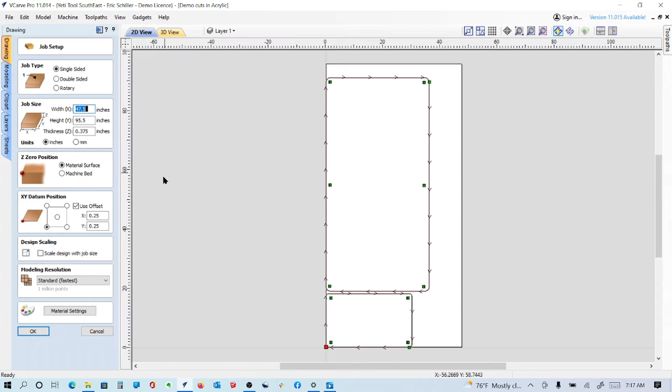So then with the laser light, I peg it on the corner of the material, and I would have these parts shifted up an inch or so, however I'm holding it down. I don't know. I may be pre-drilling this into the spoil board. He may be using tape, CA glue. I'm not sure what his method's going to be, but I would turn this off personally. So we'll let that go though and tell it okay.

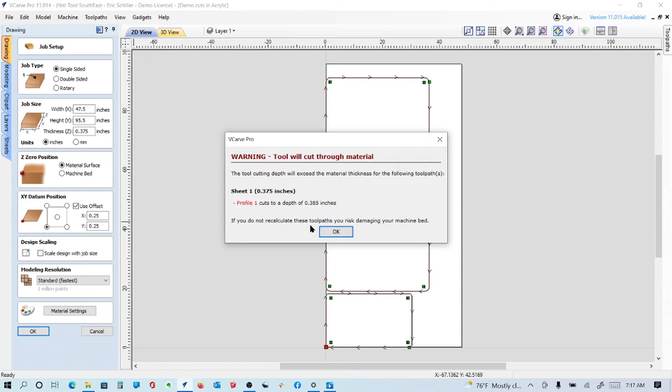It's warning that the setup is going to cut through the material, and it's only going 0.385. So he's only going 10 thousandths of an inch into the spoil board. I typically go 20 thousandths, 30 thousandths. I use the spoil board as a spoil board. I cut through it on purpose and just replace it. I use paneling. I do not use 3/4 inch material for the spoil board.

The table on the SmartBench is a little different in that it only supports the spoil board where the X beam is and in the middle of the table. So in my shop in Birmingham, if I leave a piece of 3/4 MDF up on the spoil board over the weekend, it's going to droop on the corners here. And then when the X beam goes to it to bring everything perpendicular to spindle, it will raise that up. But it'll also, because it's 3/4 of an inch, hump up off of the table in the center of it. So don't use a thick spoil board.

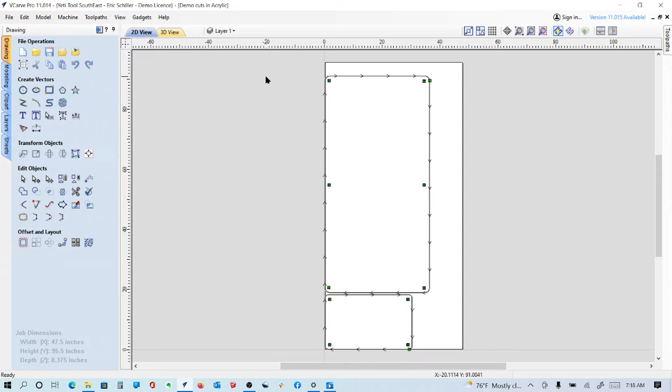There's nothing that says to use a thick spoil board. Everything says use a thin spoil board. On the Yeti, my movies at Yeti Tool Southeast, or any of the movies that are done through the Yeti CNC Academy. So that all looks good. He's got the tools turned on here. So let's just look at what he did. So we're going to hit the curtains and go from the design side to the cut listing side, and we'll look at the profiles that he's using.

Again, he's specifying only 10 thousandths of an inch deep. That's fine though. 3 passes, so 1/8 of an inch per pass roughly. He's cutting on the outside. I would do a separate last pass. I'm not sure how this acrylic is going to be used, whether it's going to have an edge to it or an exposed edge or not. But I typically would turn on and do a separate last pass at 20 thousandths.

And I don't know how he's holding it down, so I would typically add tabs or have some hold down method. And again, if we're drilling these circles here first, we could, depending on how we're doing our runners for the upper beam, screw down through these holes. But I would do ramps. He's got a ramp coming in, and it's set at 2 inches. That's going to be slow if we look at our speeds. So everything basically looks okay here. He's ramping in. It's a longer ramp than you need, but let's look at the speeds.

So we're going to go to the tooling that he selected. It's a 1/4 inch end mill, and we're going to edit the setup, and we're running 19,000 RPMs. That's good, but the feed rate is awful slow. 600 millimeters per minute is not going to give us the speed that we want.

The swarf, the debris, is not going to be adequate to cool the bit, so we need to jack up. And also the plunge rate is only 10 inches per minute. I would double that, so I'd easily go 500 for the plunge rate, and that's 20 inches per minute roughly. I'm not going to do the metric equivalents, and I do everything in imperial numbers on my setups.

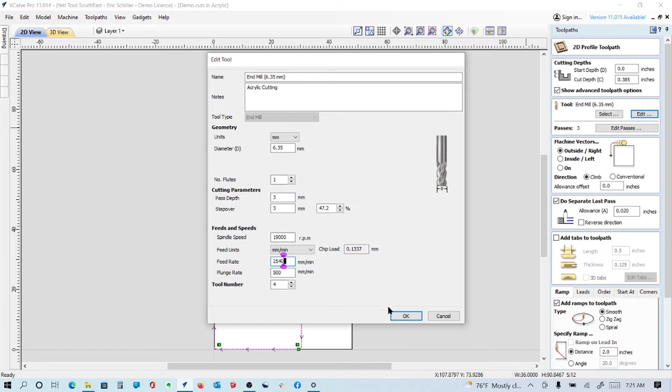But the feed rate, I'd program it the first time for the test cuts at 100 inches per minute. And depending on how I'm doing the cuts, whether I'm doing small ones or larger ones, test it. But that's what you want to do. And he's cutting a new material because he's a new SmartBench user. So I wouldn't start on a finished product that he's due to deliver to a customer. So I would basically make those changes.

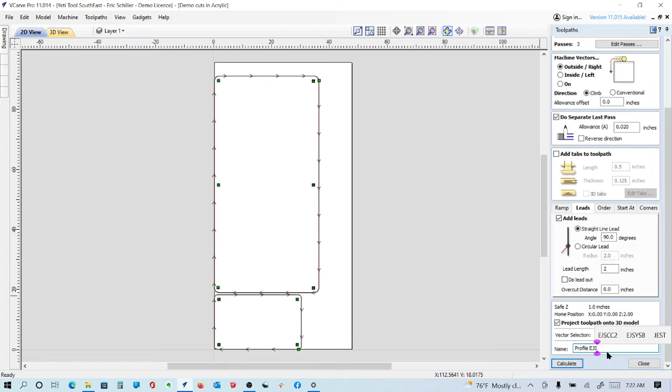I would also, with acrylics, change to do lead in and lead outs. You could do a circular with the length lead being 2 inches or whatever, so that we're getting full depth before it gets into the material. That's fine. I'm going to call this profile EJS because I've got different speeds. Test. No vector selected, of course. That was silly. And I do my holes separate from my profiles there.

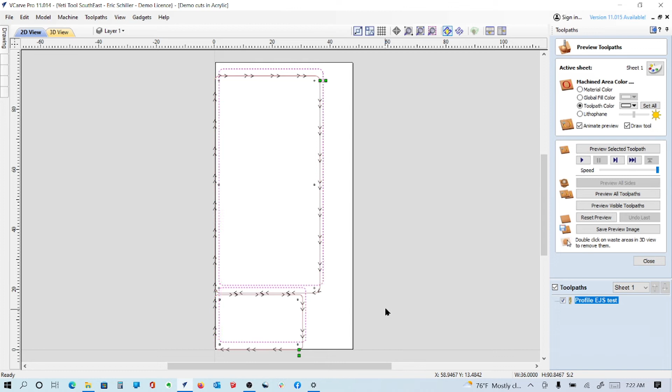So I would calculate those, tell it OK, and I'm going to go back to do it the way I would do it. Now that they're selected, I'm going to use the arrow keys and move them up and over. If I turn off my tooling, I have room to hold this down on. They should have been grouped, so I'm going to do Control Z, edit, undo, nudge, Control Z multiple times. I'm going to select everything. I want the holes to move appropriately with the 2 rectangles.

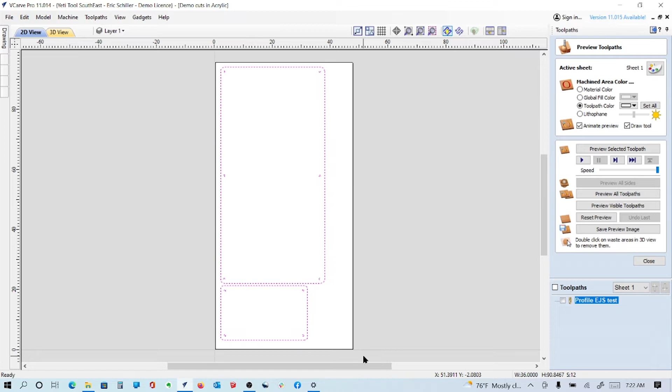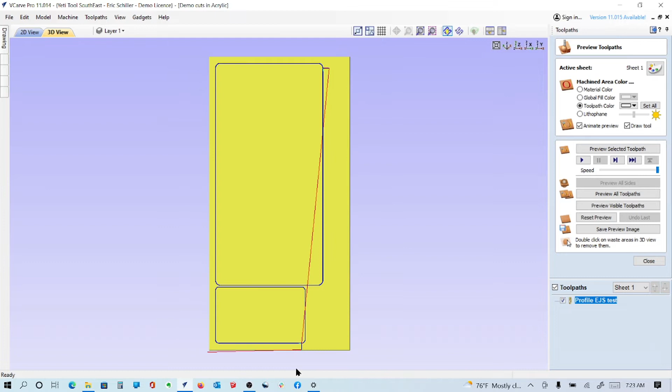So now it's moved. And when I do this work again, I can just double click on this, and it's going to reselect it, recalculate it, and we're good to go on the panel the way I would do it, with everything separated from the edge of the file. So regarding the ramp in, ramp out, let's look at the lead in, lead out. I like to do circular ones. The way I had it clicked was doing a straight lead in. I just prefer these. I can see them easier, and we're going to recalculate. I do it lead in and lead out.

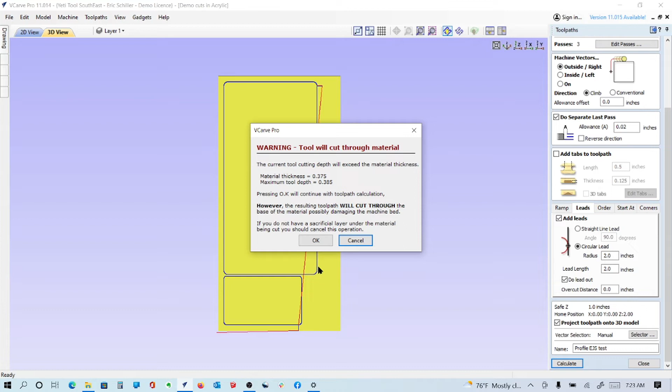What that can do is stop the bit from moving up and down once it finishes the cut in the cut line. If it moves up and down and the bit is hot, it can burn wood or other materials like that, or it can melt the acrylics. So by doing this, we're going to come in from here, ramp down to get to the proper cutting depth before we get to our vector line, and the edge of the tool should be on the outside of the vector, then make the first cut and come out. Come back over here, do it again for the second cut, and come out. So that will work really well.

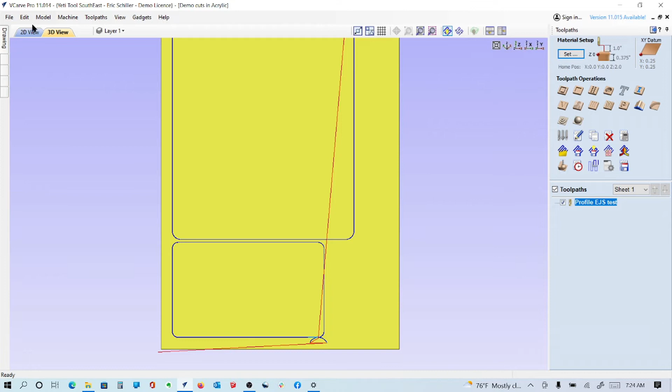If we look at how that's determined, I can turn on the 2D view by just clicking over here. That's where we can look at this information, or I can split the screen. So I'm going to zoom in here, and if I turn off the tool pathing, go to the vector that I was working with, hit the right button and go to node mode, the green box is the start of that mode, the way the rectangle in this case was drawn. I can change that and put it anywhere.

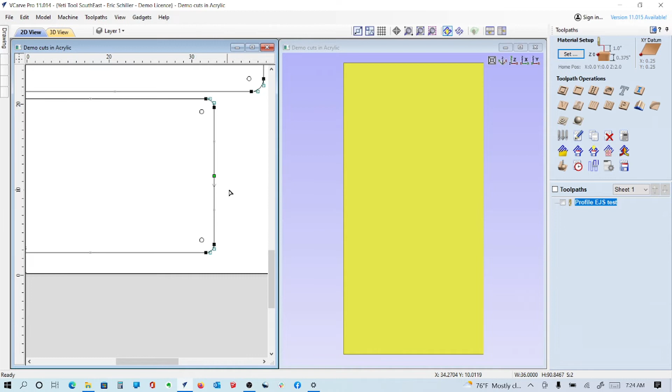I can just hit the right button and say insert a point. Now that I have a point, I can hit the right button and say make that the start point, and now it would ramp in here, and we'll let it calculate that. And so now it's coming in that area. You can also do that from within the lead in, lead out area.

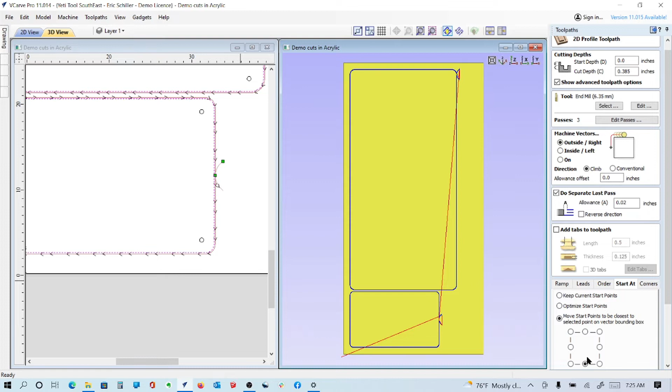If I go to leads, I can say start at, and I can have it selected, or I can say I want it to be on the middle of the bottom side. So I'm going to slide down, move it to the middle of that. So there's all kinds of power in this. Let it recalculate, and now it's here and does it there. I didn't want it up here, because if I did it up here, it would be in the middle of the other piece.

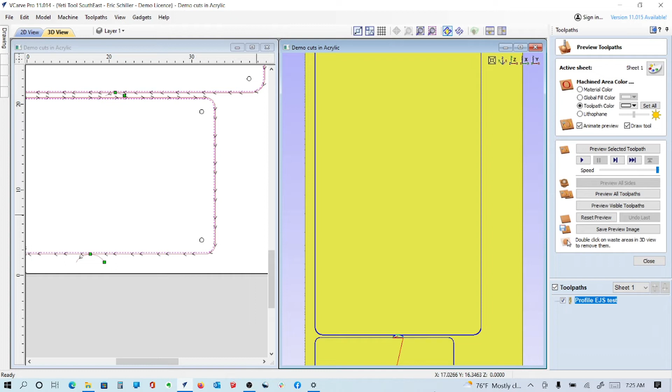And that's what it said here. It gave us a warning because it did it for both of these 2 rectangles. And if we look right here, we can't fit that, shifting it, we can't fit the specified lead in and lead out there. So on that one, I would have to change it. Again, I'll just make it easier.

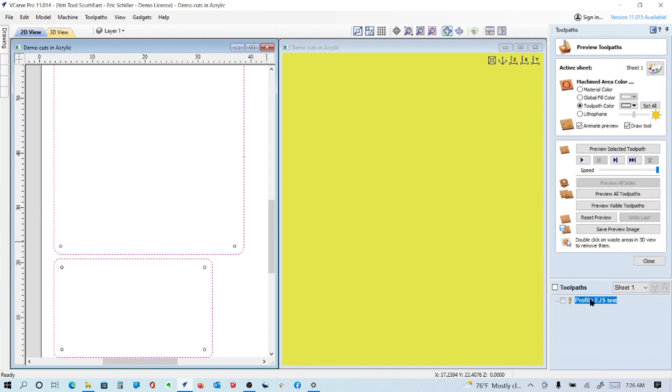I'll turn off the tool lines, go into node mode, and specify to insert a point and make that the start point. And then, although I have told it to do it and specified it there, it's going to redo it based on having that as the start point. No, it doesn't.

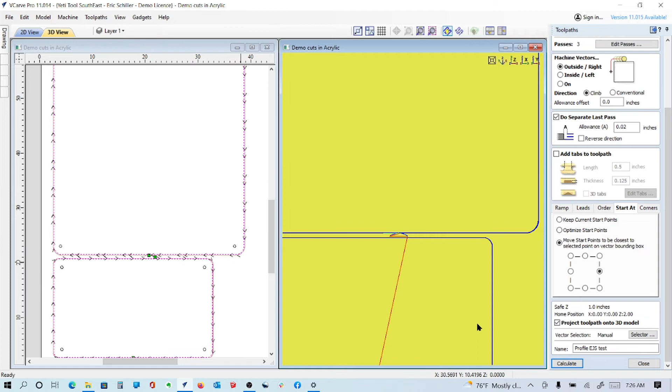The problem with doing it that way, by specifying the start at points, is it's going to do it for each of the 2 shapes that I have, and they're not close enough. So if I do them on this right edge here, then that's fine, and it will work. If not, I got a pop-up message saying it had to clip some of that circular lead in order to make it not interfere with the adjacent part. So we have to watch those if we're going to use the global type tool.

I don't typically do that. I just select my points and put them where I want. But that works well if that's the way you want to think. So with that said, this is a better setup for it, but I would definitely make sure that you're checking your feeds and speeds. With acrylics, speed is your friend. Going slow is your enemy. So let's adjust feeds and speeds, get them up at least 100 inches per minute, probably 150, but let's try it. So how do we try it?

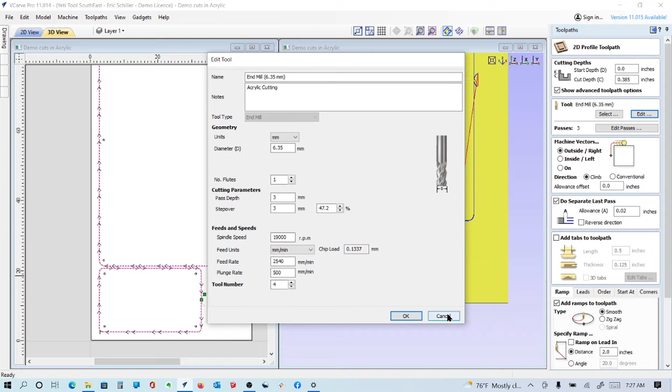Before I cut this part for my customer, I would go ahead of it and draw some small rectangles and do some test cuts. So here's what I would do. I would put a 4 by 4 inch rectangle. You can do the softer corners, radius corners or not, doesn't matter. But I would do one of these, and I'm going to select it, use my arrow keys, and drop it down here into some of the waste. And I would do the same exact setup.

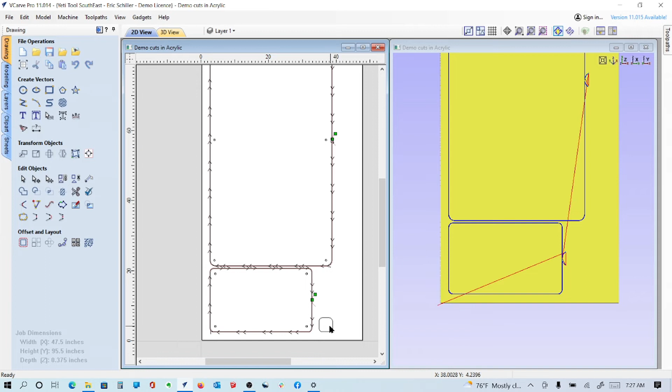Now, if I wanted to really test the full speed, I could do it more like a rectangle, to give it time to get up to speed. So I'll make the height, say, 12 inches. Because it's going to ramp in, again, if we look at these setups, it's going to ramp in slow in this circular part, then get to speed. But it takes time to go from ramp speed, which was roughly 20 inches per minute, to high speed, 100 inches, or whatever we're going to use.

So I would set this up this way. I'd go to node mode right away, and I'm going to have it make this the start. Well, this is the starting point. That's fine. So it'll get closer to being at full speed before it has to slow down and make the turns. So you may do a couple of these and do Control C to copy, Control V to paste using a Windows system, and drag it over and have multiples of these. And I would do the same thing with the holes too, because they're different.

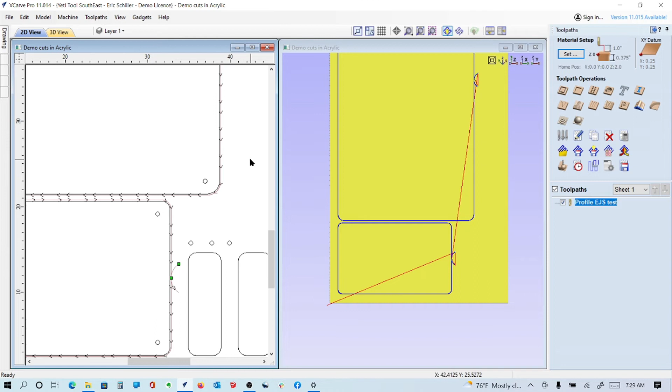So I'm doing Control C, Control V, and if I select them, I can nudge them down to get them out of the way, and go back to the tool pathing. And then I'd set up, and I'd come into it. I don't want to use the one that I was using before. I'm going to deselect everything, turn off the tool pathing on screen, and I would do a profile cut, and I would pick the same information. I would do this in 3 passes.

And again, I could be more aggressive on this, but we can test it. We're going to be outside. I would do a separate last pass, so I'd oversize it by 20 thousandths or so. So rather than the edge of the tool being against the finished vector, it's going to oversize it by 20 thousandths for the first pass and the second pass. Then the third pass, it's going to bring it back so the edge of the tool is at the vector line on the outside of it.

Now that's going to take the witness lines out of the first and second pass, if there are any, depending on the material. This may be important on this material, it may not be, depending on how it's being used. I would add tabs, and I'm just going to do these manually, and I would just make them 3D tabs, and I'll just add them on there. No vector selected. I would do this one and edit the tabs, and I just put one here and one here.

If I want to move one, I hold down the left button and drag it. If I want to delete one, click the left button when it's in tab mode. I'll just leave it like that. He may be using tape, I'm not sure.

And so I do want to do a ramp in, and I would do a lead in and lead out. Turn it on. I like the circular ones personally. That way I'm doing the full depth of cut before I get into the material. I want to be out of the cut line as much as I can. And I will let it select the order, and I will move it if I need to.

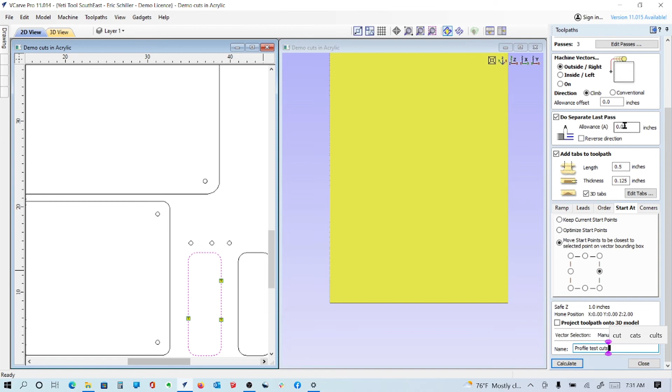I know my plunge rate is 20 inches per minute. I know I'm doing a climb cut. I know that I'm doing an allowance, an oversized allowance. I know I'm doing tabs, and I know I'm doing the circular in and out. So let that go, and there's my setup.

So it comes in slow, gets to the full depth of cut for the first pass, and takes off. Makes the turn, and I have 12 inches roughly for it to work here before it makes the turn. That's 10 inches before the turn probably. So it can get up to a fairly good speed. See how I like that?

Cut that piece out and mark it. I would put that information. I'd put my feeds and speeds, my rotation, that I did a finish pass allowance, that I did a circular ramp in, ramp out. Once I get this dialed in to the way I want the finished product to look, then I apply that to the rest of the material that I'm going to cut for the customer.

Of course, we know that we can also, this test cut, I can raise that up and do that first. And so that's all I'm going to cut out of this sheet. The sheet's on the table, ready to cut product for my customer, his customer, but I'll do the test cut first. And I'll do the same thing with the holes. I'll come back in here.

The way he had it set up, he did the same setup, and it works. He had the same setup for the parameters for the border cut, and was using that same information to be on the inside of these lines, of these holes for the inside cut. I typically do my holes separate because I may play with it. I may do a longer ramp in, ramp out, so that I'm doing a helical setup.

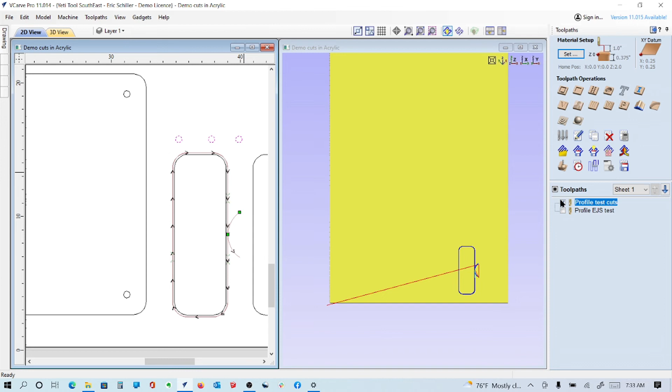But I'll change the speed as fast as I can, but it's going to do a helical setup just to dust the whole thing and cut all the debris away. So that would work too. So I would do a profile cut. Turn off everything you see. I'll do a profile cut.

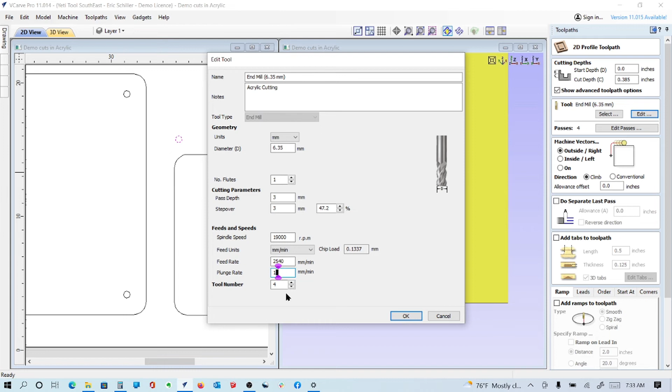Keep the same information, but I'm going to speed up the ramp in, and I'm going to put it at our max, which is like 43, so say 40 times 25.4, so 1,000. If I'm in millimeters, I'll do 1,000. That's the fastest we can basically go in our down spiral, because I'm going to set these up to do a longer lead in.

I'm going to ramp in over 2 inches, or say 3 inches. So what it's going to do is just go in and go in a circular while driving down and cutting. And we'll let it profile, test, cut, circles.

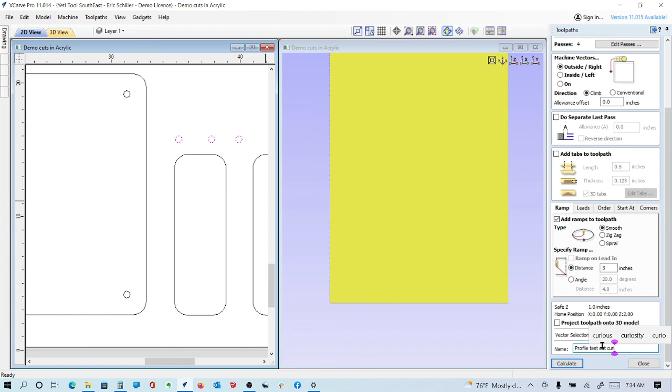And it's warning us it's going to cut through the material. Again, that's not deep enough. I'm going to change that to deeper. And I'm going to do T for the thickness of the material plus 0.030 equal. So I'm going 30 thousandths deeper. And I'll do that in 4 passes.

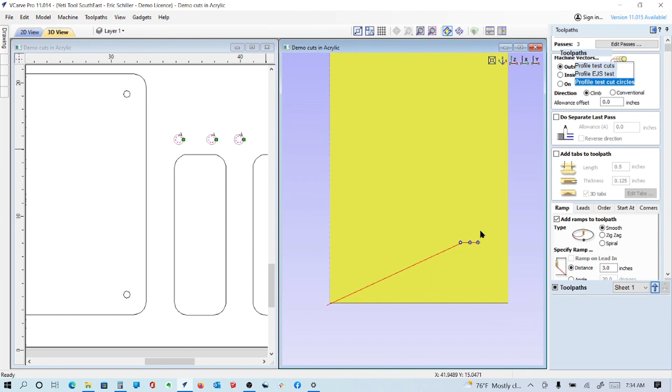And calculate. It's just going to cut through the material. And then I'm going to zoom in. We're going to look at this. It's going to go so fast we're really not going to have time to see it probably, but you can see there. Whoop.

You can see there the multiple passes. It's this, but you can see here the setup that it's doing, just a spiral entry all the way through. So we'll reset that preview, and I'll slow it all the way down and preview the visible. So there it is. It's just going down.

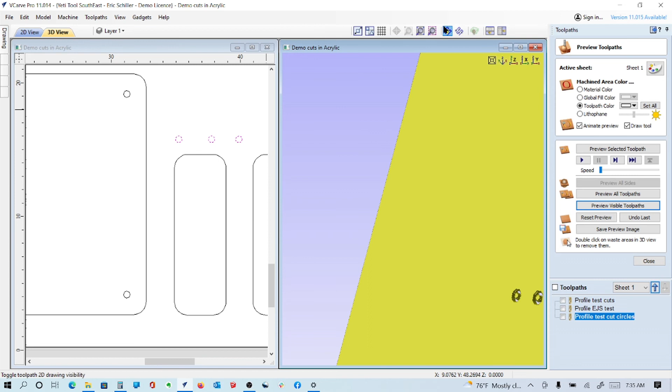Now we want to make sure too that when we did this, that we're on the correct side of that line. So I'm going to close this down, and I'll turn on the toolpath, and we want to look at them here, and we're on the wrong side of that line. So I did this by turning this off and on, and it can be a couple different ways. It can look like this, where it shows the direction of the travel and also the center line of the tool, but I like to use the blue lines because it's quicker sometimes. And I see that I'm cutting on the outside of that tool, so that's wrong.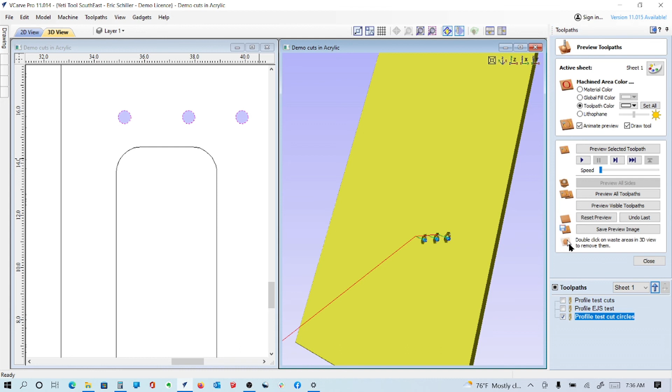So I'm going to go back into that operation, and I'm going to change it to the inside of the tool, and that made sense. I just missed it. And we'll recalculate, reset. So if after you've done this, you don't like the quality of this first set of holes, what I would do is now raise this up, and those would be the first 2 that I would send to the machine. If I don't like the quality of the edge of this part and the holes, or I can put the holes inside, it doesn't matter, I can modify it. Do it again.

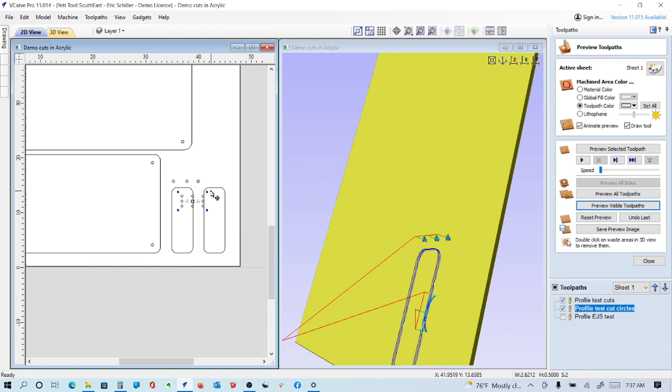Take that whole thing, take some of these holes, and I'll do Control C, Control V, copy and paste, and I'll just drop them into the part. So then I can see, and again, I can write all this information on this sample part and keep this on a keychain or something on the wall. So I have my feeds and speeds for 3/8 inch thick acrylic with a certain bit. So say I'm using a 1/4 inch spiral O, and I know my feeds, my speeds, my ramp in, my ramp outs, finished part adjustment. Write all that on that piece and keep that piece so you're ready to refer to it.

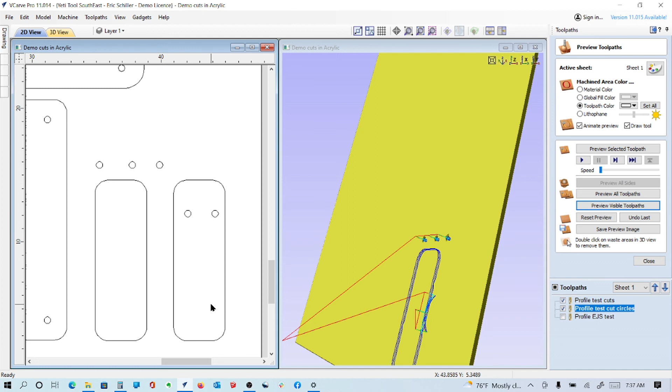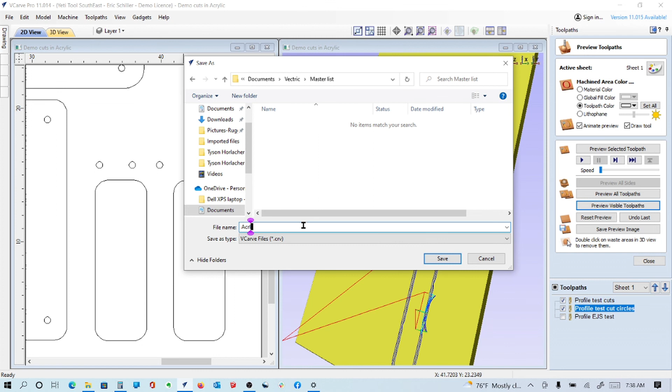Now, one other thing you can do, you can save this job as... okay, so I'm going to put these under Vectric, and I'm going to create this a new, and I'll call this master list. So this folder is going to be called master list, and I can call this acrylic 3/8 inch. Now if I do this, it won't let me take the quote sign. So again, we're going to go back to old school. 0.375. And then if I go to edit notes and put a period as my first entry, this will pop up when I open this.

So I'm going to have a folder called master list where I can put my different materials in there, whether it's coroplast, dibond, HDU, acrylics, whatever. And this will be, my favorite tool would be a spiral O, and that's a 0.25 inch tool, and I did 100 inch per minute, 50 plunge, 0.020 finished cut allowance, ramp 2 inch, spiral lead in and out, and this was a climb cut with tabs or without, you know, it doesn't matter. So that's my information. So I can pull this up and I can have a nice quick reference.

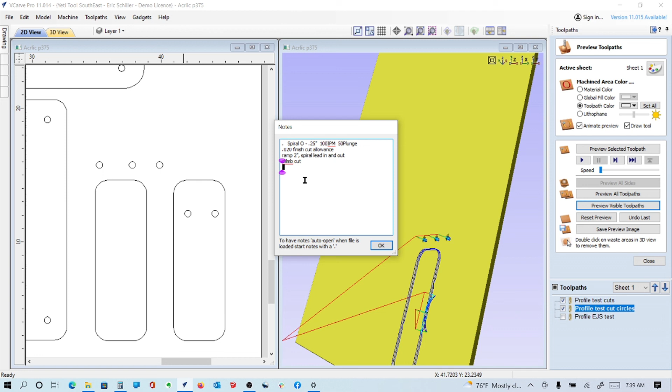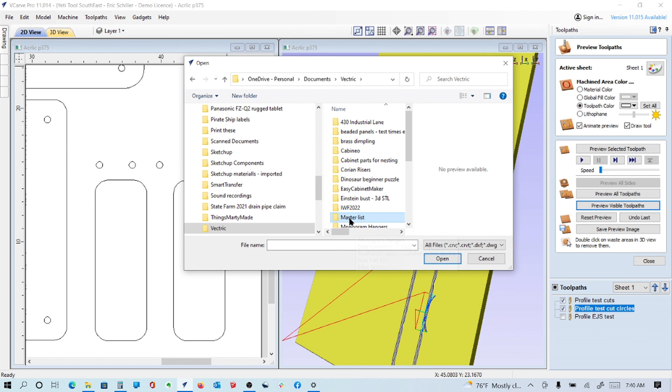So if we close this down, I'm going to say file save, and then I'll close it. I'll just open a new one. So I open this up. I closed that out and didn't show it. I don't want to have anything that shows file names and things like that. So this is the master list. And then there's a file called acrylic. We open that up, and then this pop-up box will show up.

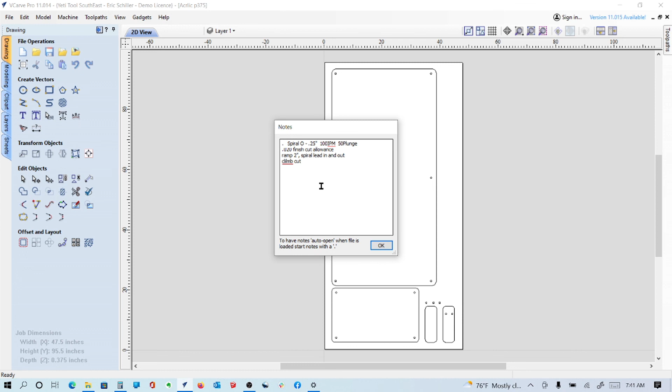So there's my information. Now I use this notes all the time if I want to change a design a little bit or tweak the design, and I'm going through different iterations of the design. I use this edit notes, put the period in there, and it pops up every time someone opens the job. So that's pretty cool. So I'm going to end this video there.